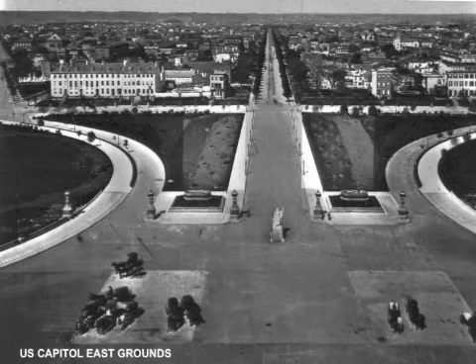This is Olmsted's design for the Capitol grounds. It had about 20 to 21 streets and paths that entered the Capitol grounds. So a phenomenal degree of openness and accessibility was part of this original design that he felt was appropriate for an expression of what we were as a democracy.

Even in small town America, the courthouse square, accessible from all directions, at the very center of community. It's hard to imagine how barriers effectively can kind of work with such a kind of expression of openness. Even in planning larger municipal groups here in Cleveland, the courthouse is a key part of framing public open spaces in an open and accessible way.

So when did our ideas change with respect to this kind of degree of openness?

And when did these kinds of symbols become less open and become more, you might say, targets in Brian's language? It really wasn't 9/11, it was the Oklahoma City bombing, which fundamentally shifted the perception of a place.

So what are some successful precedents in recent design efforts? In 2003, with the design competition for the Washington Monument, 5 or 6 talented designers were shortlisted. This is one of the entrants, Michael Van Valkenburgh, who created a scheme that used one of those time-tested methods.

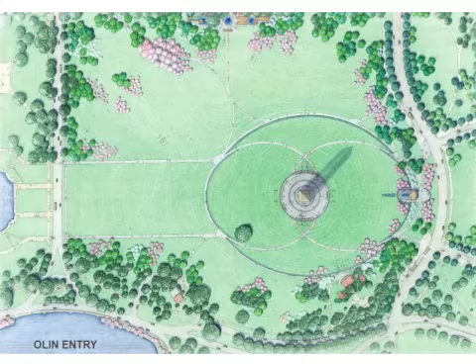The winning scheme by Laurie Olin also had those same aspirations. It was a simpler solution - sunken walls around the monument, clarifying circulation. But importantly, it was understood with a keen appreciation for the topography of the monument, so it becomes almost a base around this elevated condition, the hill the monument was sited on. It seems like a very logical expression of a way to express the monument on this larger base.

It's much like Olmsted's work on the West Terraces, which was a logical expression of making a base around the Capitol on the west side, and just feels right and appropriate.

The wall itself also has other kinds of opportunities for use - it becomes carefully calculated for seat height. And it's not a small matter, because you have ADA requirements in terms of people falling off the edge, so you have this curb at the bottom to reduce that height, and a warning strip in the back. So it was a carefully crafted design that most people look at as a positive contribution to the experience of the monument.

These are the conditions we face, which are always challenging - that's where the interface with circulation through the barrier and what happens with the bollards.

So here was Olin's expression. He acknowledges borrowing from the past, from these 18th century precedents used in country houses. It was entered as a design award in 2008, and the jury gave a very interesting summary of why this scheme has been so successful.

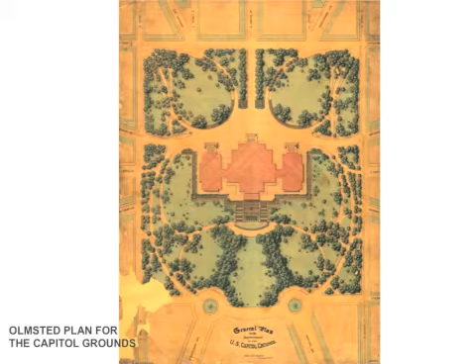I love the biography of Jefferson, where the story is that he rode his horse right up to the Capitol, gave his second inauguration. It was open to all.

But by late in the 20th century, you had this condition - paths were carefully defined, with ubiquitous planters as vehicular barriers. Presumably circulation is restricted here to keep people from moving all about, or to protect them from congressmen driving on the plaza, perhaps.

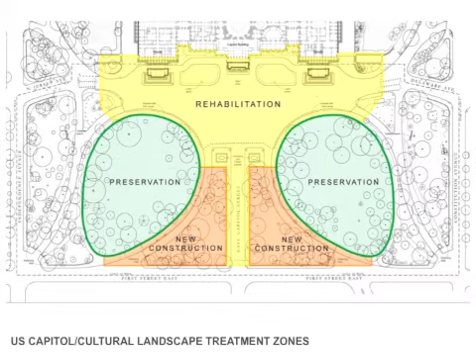As part of the process, we worked with the RTKL team as landscape architects. We identified, working with a historian, what the key zones were, the most significant cultural landscapes. There were zones for preservation - the ovals - rehabilitation, where you could accommodate some changes in the plaza, and then these intervening areas were identified as zones for new construction, less character-defining than the more culturally significant areas you see in the oval and the plaza.

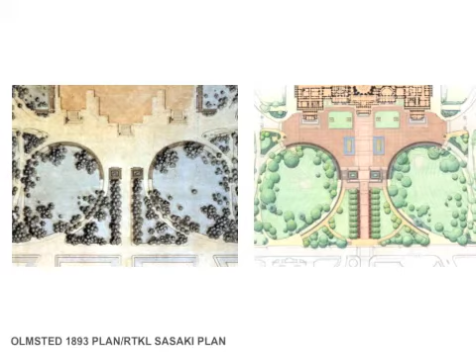So that became a zone to enter the visitor center and provide security for all those who are entering. The plan of the Olmsted scheme and the new scheme for the visitor center looked quite similar when viewed from above, but a fundamental shift has occurred.

Instead of entering this building based on the classical Greek and Roman precedents of going up the flight of stairs, you now enter down 18 feet. So we've made a huge shift in terms of the basic expression of how that building was meant to be entered. I think it's a question to grapple with in terms of making these underground entries, whether it's appropriate to do that.

It is a design challenge. Here you make this break between going to the plaza level or descending down. Everyone who enters has to descend down into this most important building to Americans. So you get these kinds of expressions. We did our best to incorporate trees along that path, but still it's descending 18 feet. How many great buildings in the history of architecture are entered at such a low grade, other than funerary structures?

So you get these kind of conditions where you have significant stairs. Walls, in the original Olmsted plan, were 2 or 3 feet high as a means to guide people along. This wall is about 18 feet on the right here.

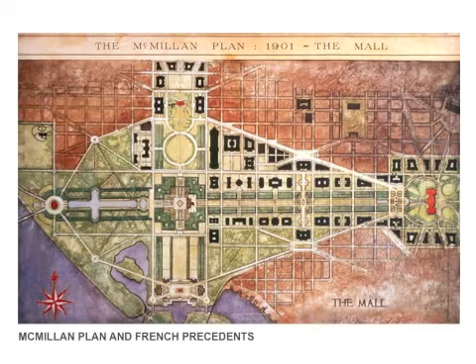So the design solution had to address that, create a zone of security, but it provided opportunities for other enhancements, significant other enhancements. But what's challenging in these kind of environments, if you look at what influenced the plan for Washington, the McMillan plan, were French precedents. The French garden, which is very flat and very horizontal, is like a landscape stretched over a very flat surface with some subtle grading. So how do you integrate walls and barriers into this open, flat, expansive landscape?

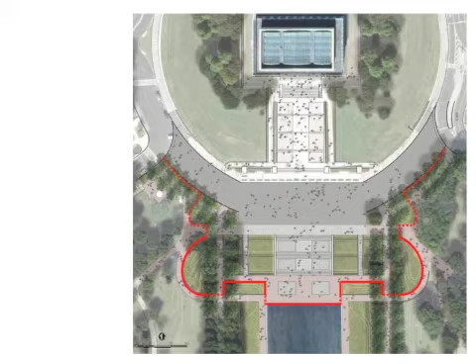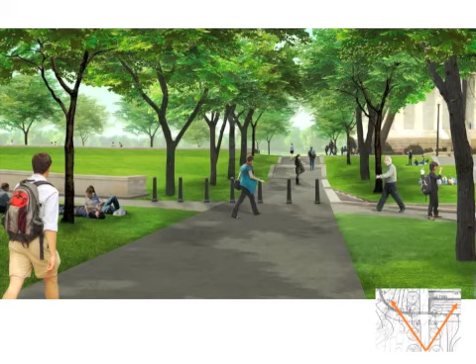This is the scheme that, fortunately, at this zone here, there was a change of topography where the grading along each side of the elm walks and the reflecting pool meet this transition zone up. So there was an opportunity here to integrate in a hybrid sort of way multiple security elements. Overlaid on that is a combination of bollards you see on top, site retaining walls around a new ADA accessibility route, a low wall where the grade transitions, and then actually deepening the pool itself to complete this integrated ring of security at the Lincoln Memorial, which is now under construction.

So when you look at this view, it looks like a series of improvements to that landscape in terms of making an accessible route from above. That's a curving path you see here on the left, but integrated with that is a wall. A low wall here at the end of this path, and this is a new path on what is otherwise open, muddy turf many days. So in this line of security is the pool itself you see on the right, the bollards, this low wall.

And then this wall with the ramp on the left. So an attempt with a whole series of elements that are connected to almost make it disappear, to make it look like there was no new design here, but just upgrades to the site itself. Inevitably, when these paths cross the vehicular barriers, you still get bollards, unfortunately. But you see on the left here, the wall is graded into the site to disappear. This is then the result, a new path along the edges, and then these new improvements on each side of the memorial.

Now, a tougher problem are streets and urban streets in a tighter context. What do you do? This was a study done for 12th Street and Franklin Circle in the middle of the Federal Triangle. It was only limited to that street and the hemicycle.

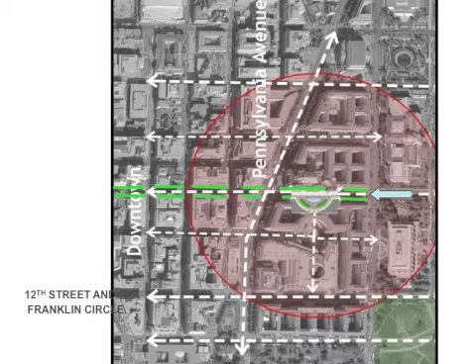An interesting condition - you have EPA on one side, IRS on the other. At one point, the buildings, the pavilions at the end of the hemicycle are about 3 feet from the street. So very close. Then you have a wider plaza in the hemicycle itself. The criteria was to make the barrier as far away from the buildings as possible, which was odd in that at one point, the threat was only 3 feet away.

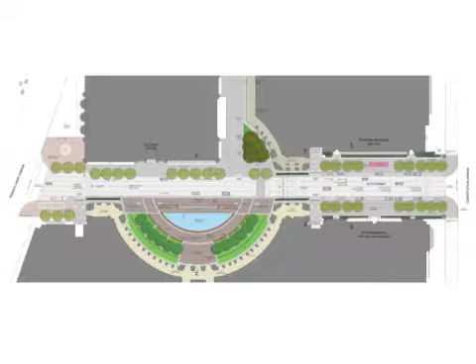So the plan that was developed incorporates planters on 12th Street, going south - this is a key entry to the city. A fountain and a fountain edge in the middle of the hemicycle, and then some adjustments to the traffic lanes to get a little more space where these pavilions neck down at the street. This meant working with city and traffic to condense the traffic lanes, eliminate the parking, and gain about 10 feet or so where the building is actually so close to the vehicular way.

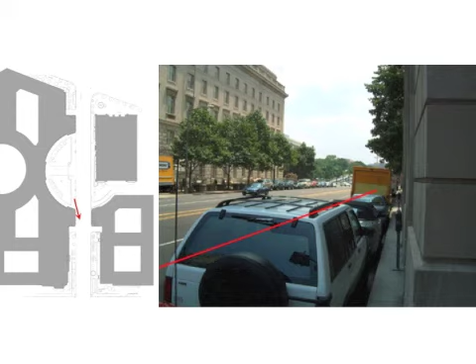So it's taking that section below there, converting it to just 4 lanes. But what is odd to me is that the criteria still demanded that the perimeter barrier be all the way out to the street at the space of the hemicycle. So here you have 80 feet in one place and then just a few feet in another condition. It almost seemed like an irrational set of criteria.

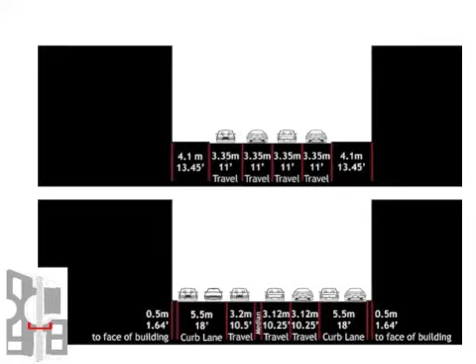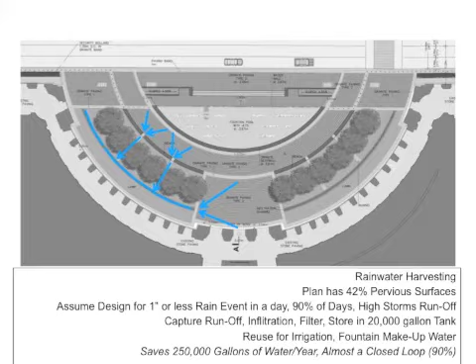But coupled with that idea - this was never implemented, but there was a chance to greatly improve this space, which desperately needs it. An idea to make it, since the EPA is right here, almost a closed loop in terms of how water is used for this fountain. All the water that falls on it is recycled into the fountain or irrigation. So there was a chance to do more, once again, motivated by a security imperative.

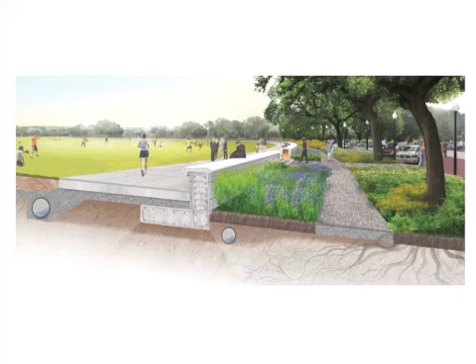The ellipse - I hesitate to comment on this because we were an unsuccessful entrant in this competition. The ellipse was a challenging problem. It is a descendant from that idea of the French landscape extended over this very large area. So it posed particular problems, and I was surprised that the winning solution actually raised the elevation and created a wall around the entire ellipse. This was meant to be a flat landscape with relative openness to the spaces beyond. So to me, the security imperative outweighed the considerations of the cultural significance of this landscape.

So I'll leave you with a few questions that were raised by this presentation. Are the security requirements appropriately defined? Sometimes they seem to be, like for example at Franklin Circle, unevenly defined.

Are the historical precedents being used appropriately, especially at culturally significant sites? You can't simply add these walls. It has to be integrated with an understanding of the original design intention of these sites and with respect to the topography and grading intentions.

Are historical precedents of site security more relevant in more urban conditions along sidewalks? I think not. These solutions are mainly for larger landscape settings, particularly applicable, for example, our embassy program. We're working on 3 embassies where you have setbacks that you can integrate these landscape precedents into.

And this, of course, was raised by Tom - should there be security design for individual buildings or a more district-wide approach? So with that, we'll open it up to questions.